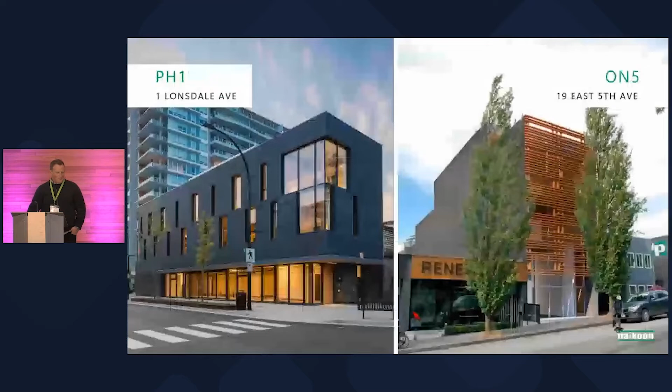I'm going to present two projects today that are executed. They're completed, they're occupied, and they have a lot of similarities to them. I'll start with PH1.

This is a 3-story mixed-use building constructed in North Vancouver. Primary structure is glulam and CLT, built to Passive House standards, and it contains a restaurant on the bottom floor and 2 levels of office above. It's just under 700 square meters in size, so it's not a big project, but it's a mighty one. There's a number of complications. We've got projects on the go now that are 10 times the size that are easier than this project was.

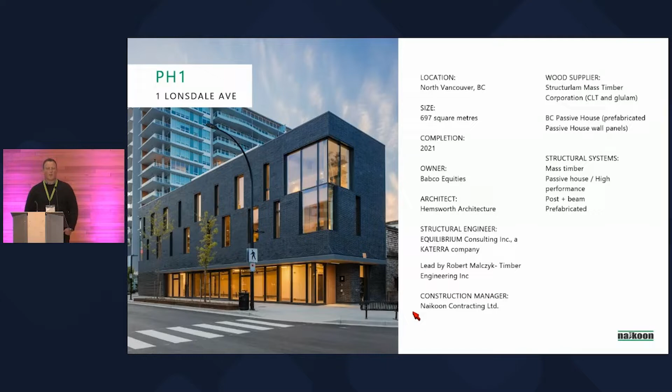A wonderful team to be able to work with - Hemsworth Architecture was the architect in charge, Dean Schwadike led that, and Equilibrium, a Katerra company at the time, was the structural engineer, led by Robert Malczyk, who's now formed Timber Engineering.

Just a quick shout out - there's over 150 people that touched this project, and they all added a piece of value to it, from the labor, boots on the ground, right up to the prime consultants and sub-consultants. It takes a team to execute something like this collaboratively. A special shout out to the owners for being innovative and forward thinking.

This was 5 or 6 years ago when this thing started, and about 3 years were held up in the development permit process to change a text amendment from the word 'this' to 'that'. So it took a while to get off the ground, but it was very forward thinking at the time.

Just context on site location and logistics. That's the site there, bottom of North Van. If you know it, it's right across the street from the Polygon Gallery, a beautiful building by Patkau Architects. It's a 25 by 140 site, 0 lot line conditions, with a neighboring property on the corner - a pretty active public thoroughfare, bus route, and a very active community.

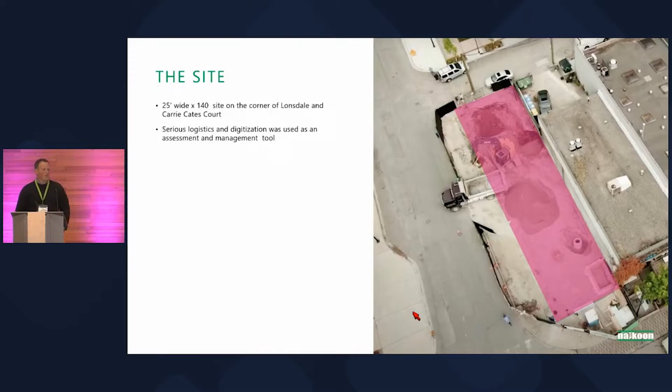Our scope as the builder - I put in quotations - as we've found over the last 10 years, our scope of work seems to have evolved a little bit as the industry evolves. We provided standard construction management services here under CCDC 5B. We provided digitization services from a virtual construction perspective, as we call it, because that's exactly what it is - I'll get into that later. We were also able to provide prefab and mass timber trade assist because we have that in-house, about 30 carpenters on our staff who are specialists in this. We were also there to provide passive house expertise.

We've completed a number of certified passive house projects across both the Part 9 and Part 3 sectors, understanding air tightness and ventilation strategies to try and optimize this building to actually get it built. There was a point in time where this building probably wasn't going to go because it didn't pencil, but we worked hard as a group to make that happen.

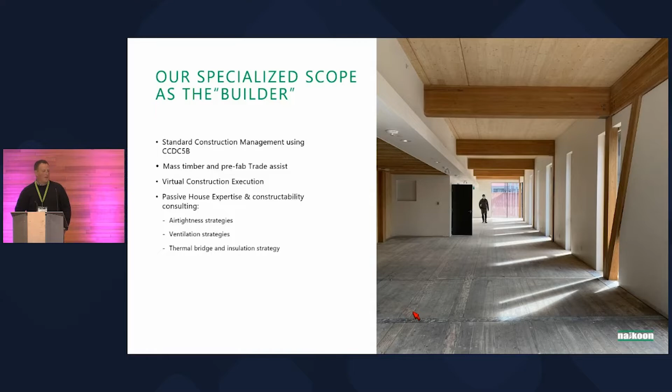From the digital side, it's a digitally integrated design and construction process - it's a bit of a mouthful, but that's what we've kind of come to land on.

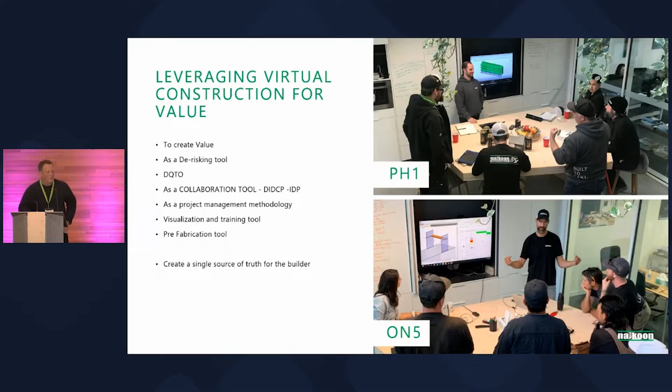It's going to take some time to adapt, so we've got to meet the gap somewhere in the middle through incremental work and effort.

And so I think having us as a builder, construction manager, at the table as a partner and integrator to the construction side of the project, along with the prime consultant who's the integrator of the design side of the process - how can we not be sitting in the same rooms together earlier and integrating these two things? Let's eliminate that line and get together sooner.

It's going to allow us to do things and try to optimize, eliminate redundancies, and find ways to get projects built. I think there was a comment about 20 projects designed and one built, and that's sad, and often it comes down to cost.

We really believe there's 20% of waste inside of these things. The fees, the services, the costing, the goods and services that are put into there, they all factor in the redundancies, inefficiencies, and sort of tolerated acceptable ways that things go in our industry. So let's work on trying to eliminate those.

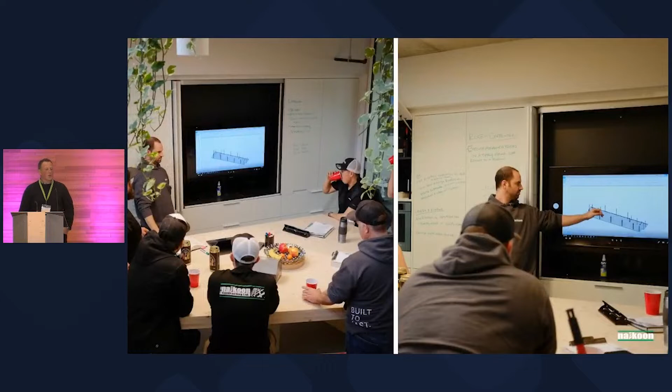Just another shot there in the office of these sessions where we would have the architect, engineer, boots on the ground, crane operator, anyone that's going to be critical in the sequencing of the project that we're executing.

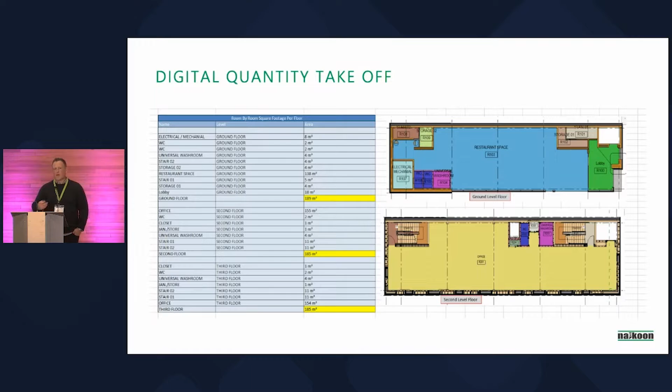Some more shots there, early days, digital quantity takeoff. Once we have this model, this single source of truth that's an actual model virtually constructed to a 400 level of detail, we can extract the data from that model and use it. The most accurate quantity estimate you're ever going to get is going to come from a model like that versus a manual process or a Bluebeam or a PlanSwift.

Being able to move on that and have live action on that model, to be able to have quantifiable conversations in value engineering and these types of instances that we all know we face regularly in projects, and is sometimes a frustration point or a point of waste.

In this case, this wasn't a BIM project, so most of the consultants were in AutoCAD 2D. There was a bit of SketchUp models floating around, but we made the decision to model mechanical in-house because it's so critical, and that's one of the key points from the integration side. Having the modeling technician, the installer, and the project manager all in-house on our team allows that to be very agile when we're going through these processes.

The technician can lean over to the project team or the construction expert and say, hey, how is this actually going to go in reality? And that avoids trying to bounce that for a 3-week kind of turnaround to get a decision made on a shop drawing or something like that.

So that's just retooling the business to be able to get ready for the robotics world and the other things that are still quite far away from where we think we're at today as a construction industry.

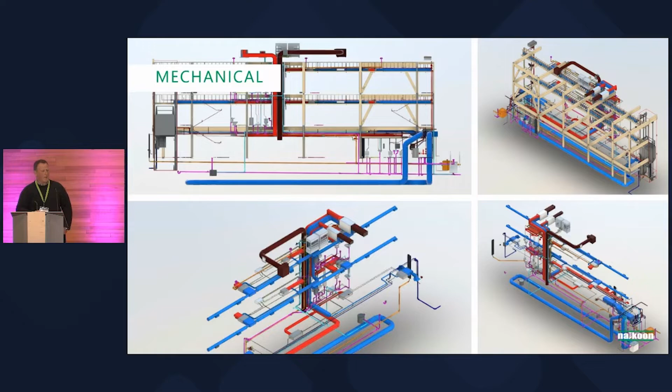Just some more shots here. I think we've all seen sort of the constructability analysis and the clash detection or clash deterrent to try and move through these projects successfully.

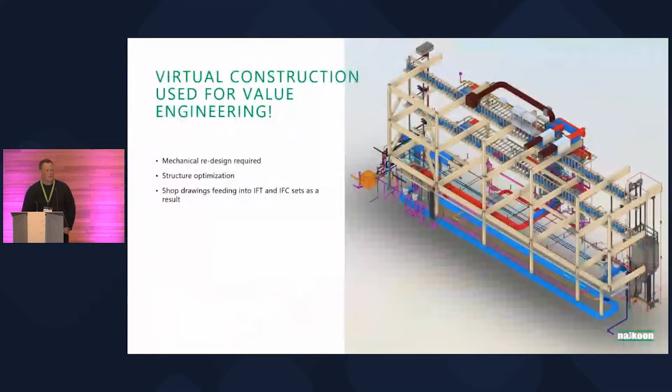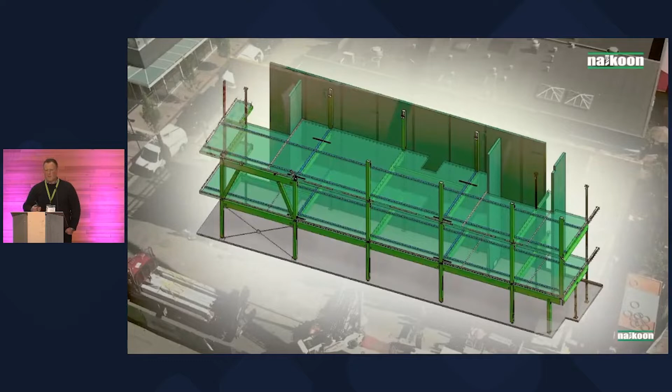Let's play a short video here, showing the result of the virtual construction of this building. So, slab on grade, there's no parking under this building. It's in North Van. You can see the final digital sequencing model. This is the result of probably 6 months of effort, multiple sessions, and actually constructing the building piece by piece.

Originally, it was a 21-day install, and this north wall, which is the wall adjacent to the zero lot line building next door, typically you'd see that as concrete block. That was always going to go in first. From the engineers, the architect, us, when we started this, that wall was going to go in first. There was no other way.

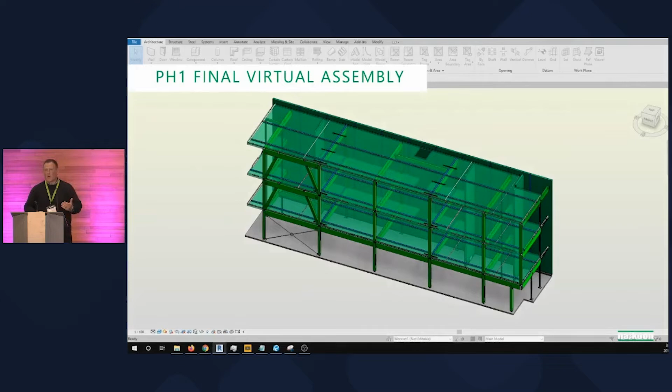Through the course of these sessions, a comment from a carpenter who was sitting in on the session—he said, well, what if we put the building up and put the wall between the two buildings? That's all it took for the group to start exploring that and realize that's a better way. That brought us down to 15 days and then down to 10 days in reality to install this building and envelope. I'll show you that in a second here.

I guess now moving into prefabrication. I could catch my breath here—I'm trying to get through a lot of content.

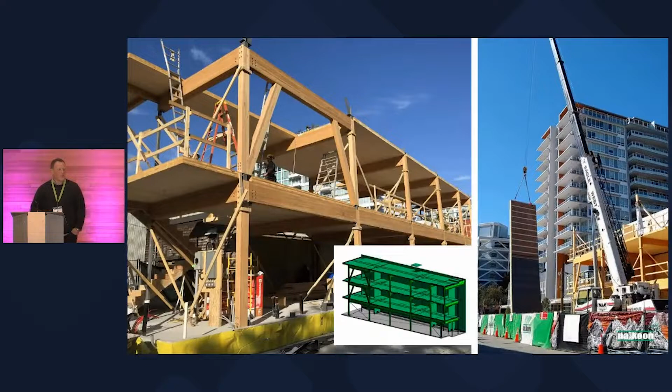Moving into prefabrication, leveraging virtual construction to be able to prefabricate this building, which was hugely successful. Just some side notes here—you can see we call ourselves prefab gypsies, so we'll just find a yard, someone will allow us to be there, and we'll set up our prefab shop.

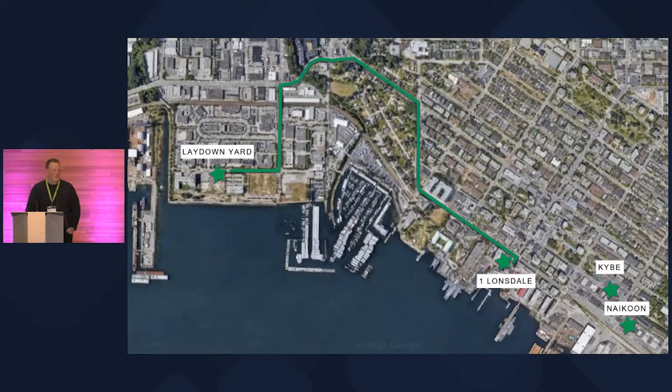And we did that here, 7 kilometers away, on a 2-acre site waiting for a development permit. So there's no shortage of those out there, is there.

We were able to prefab everything out in our yard there. Very rudimentary fabrication—we're just taking what we do on site and moving it off site somewhere else, trying to take sequence of construction and move it into parallel to save time. So trying to pick off little pieces one by one: 2 days, 3 days, 5 days. How much time can we save by running things in parallel?

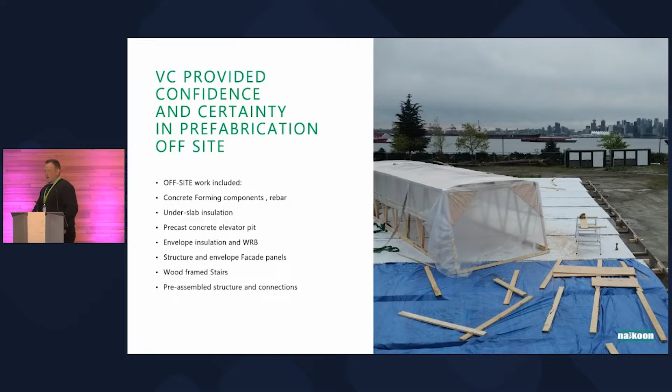So you can see our prefabrication hut there. We were able to prefabricate a number of things—this is a shot of the underslab insulation that was fabricated off-site. It's a passive house building, so there's about 2 feet of insulation under the building. But we were able to do that.

So site work's going on. The form components are being constructed and labeled in the yard, then brought to site and installed in 2 days versus having that workflow occur on site in 5 days. So incremental saving of 3 days, but it all adds up.

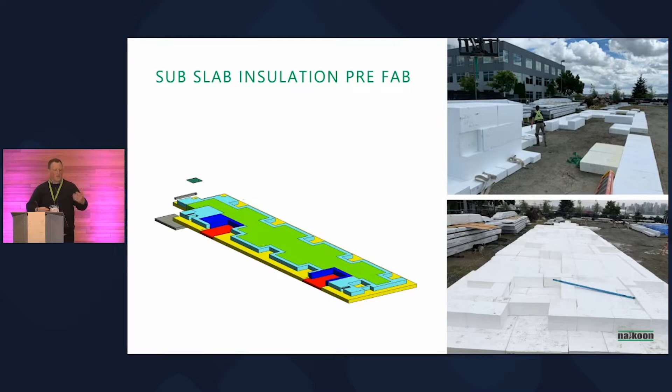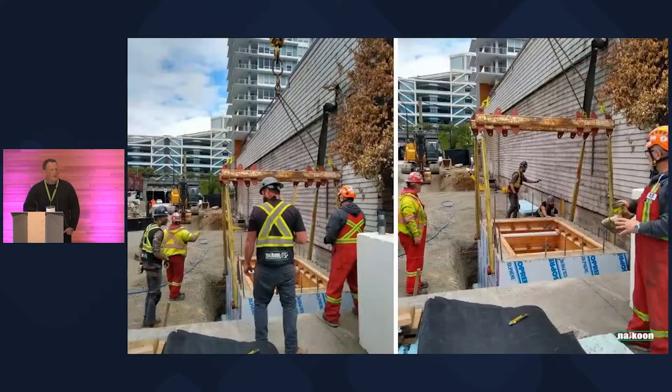This is a shot of the elevator pit. Really the only sub-slab piece of concrete here is the elevator pit, so we precast that off-site in the yard and dropped it in—damp proofing and all—backfilled it, and saved a 5-day workflow that would hang up that corner of the site and have to wait before we could move forward with the subsequent slab work.

Pre-installing hangers, bolts, brace bays—as much as we could put on the ground, safer and higher quality. We did that also in the yard.

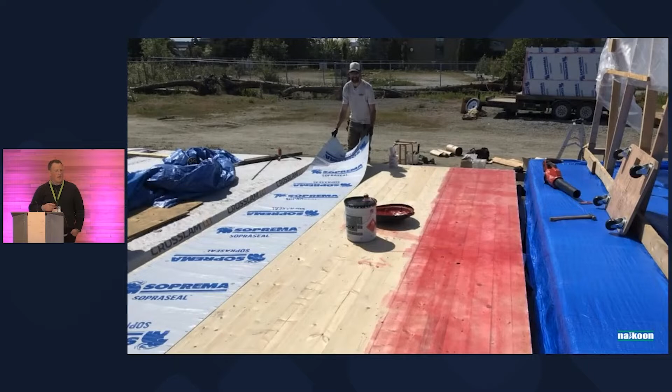Weather-resistant barrier, the panels here. Remember, it's a passive house, and what we know about passive house is we need to build it airtight to a certain standard—one of the primary project objectives was to receive passive house certification. So we were sweating on this one for sure, because there were over 60 breaks in the continuity of the air barrier, and we know that's not good. So we had to come up with systems to figure that out in prefab.

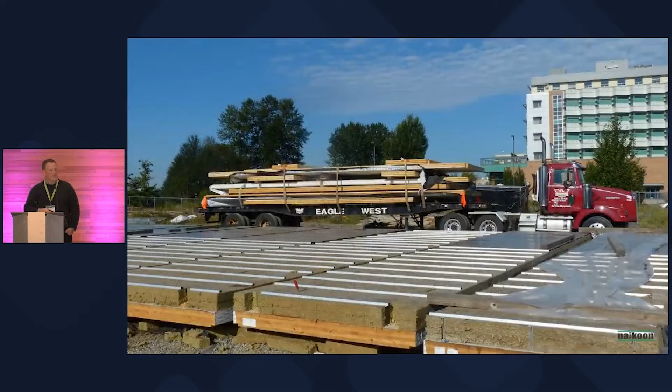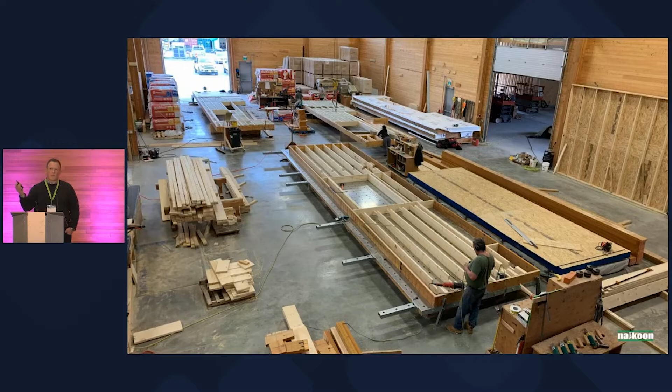Insulation, clips, counter flashings, and some metal protection board went on these panels. There's a shot of that north wall in the yard ready to be installed. BC Passive House up in Pemberton provided the exterior envelope SIP panels, which clipped onto the vertical structure.

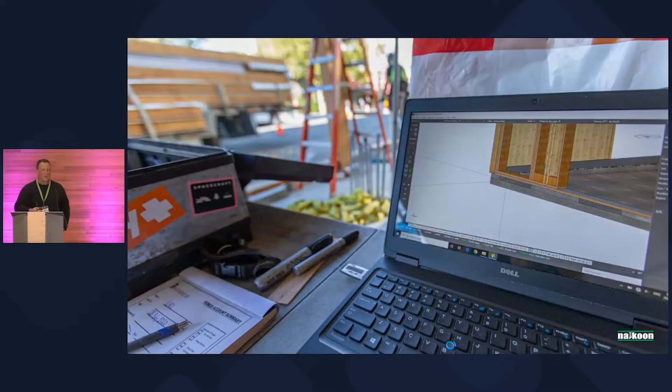So get into the installation piece—a pretty blocked out schedule here of 10 days: 8 days for the structure, 2 days for the envelope. Again, just reiterating, we were at 21 days, brought it down to 15, got to 10 in the digital build, and then executed that on site. Touching on the days of drawings on site, and stacks of ASIs and other things to try and figure out where things are at—we've got a model, we've got the source of truth that we trust because we built it from a construction mentality, and we're using that on site to run the building.

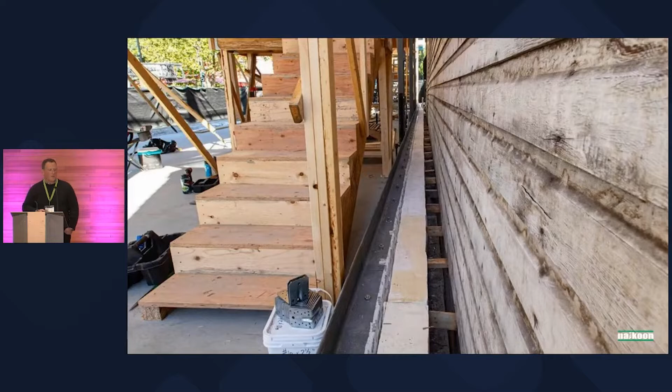The north wall here—I'll just highlight some of the slides to move it along, but you can see the narrow conditions here, being able to slip this wall between the existing building and the new building we built. And just some fantastic weather—we had good weather. You can see that was lucky.

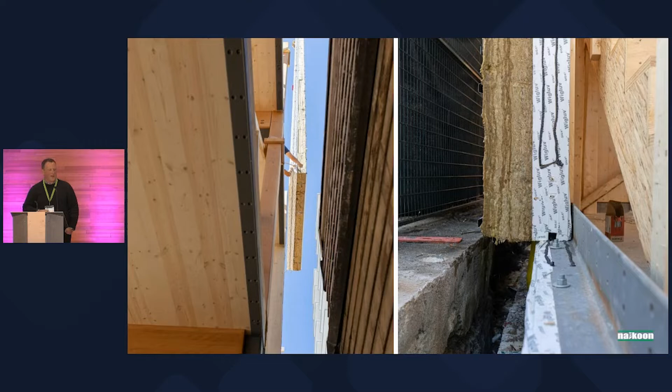Fantastic shots here from KK Law, and some of the belt and suspenders air tightness work that we had to do to meet the project objectives. You can see here there's less than 20 mils clearance between the building and the new building. And then the shot of the inside with the air detailing wrapping into the building—you can see the photo on the right of taping that air joint.

So the air barrier really went outside to inside and outside to inside, then capped with a plywood strip, and the CLT remained exposed inside the building, which was beautiful. Just a shot of that wall.

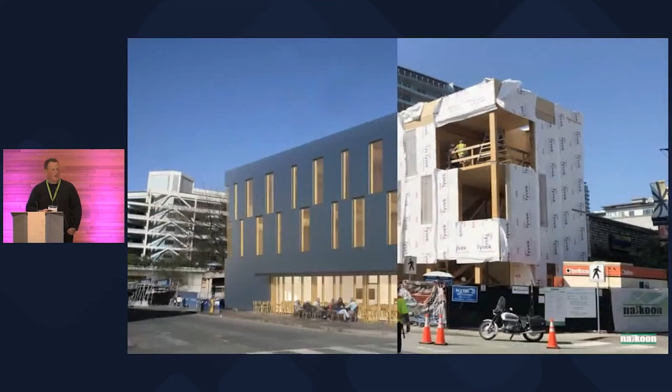Going from the panels, then wrapping the building—some slides highlighting the digitized process into reality, and really seeing this through. There haven't been too many projects that have been able to execute this level of prefabrication and do that successfully. So, a shot of a beautiful, timeless piece of architecture there, for sure—it was meant to be there.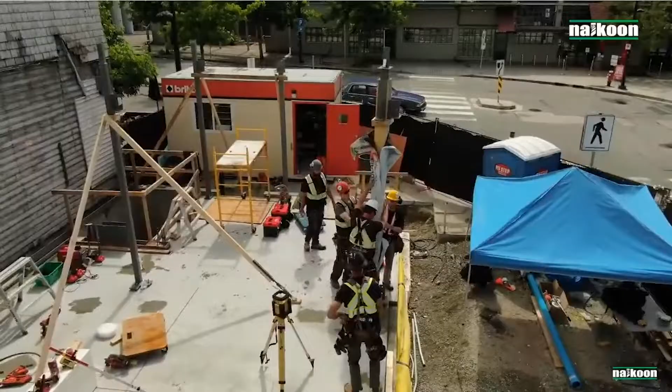Is that 40 minutes already? Done? Well, what time do you want me done? Minutes. Thank you.

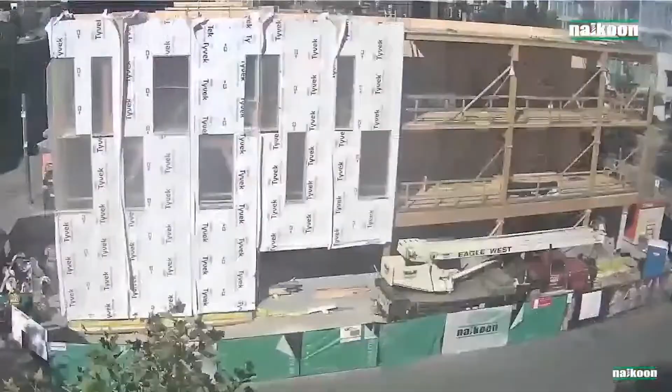Yeah, we spent more time taking photos and video than project managing there, it looked like. But...

From slab to roof, going on 10 days - full structure, building envelope, windows going in. We demoed the existing building in January 2020 and basically broke ground the end of February. And we all know what happened - early March of that year was this global pandemic thing, so we hadn't thought about that. But overall, we were able to get through the project successfully. A little behind schedule, but some supply chain issues got us there, and the panic in the marketplace that occurred for a brief period was fun to manage.

So overall, recapping the project here, just some notes. One of the first certified Passive House office buildings in North America. Pending, it'll be the first certified restaurant in the world for Passive House. 10 days of on-site construction spent on the superstructure envelope. No on-site modifications were needed. And I believe the first CLT exposed firewall in BC, a 2-hour rated firewall left exposed. And super airtight - we achieved an airtightness of 0.45 at 50 pascals, and the superintendent was able to get a good night's sleep once we had that testing done. So overall, pretty successful project.

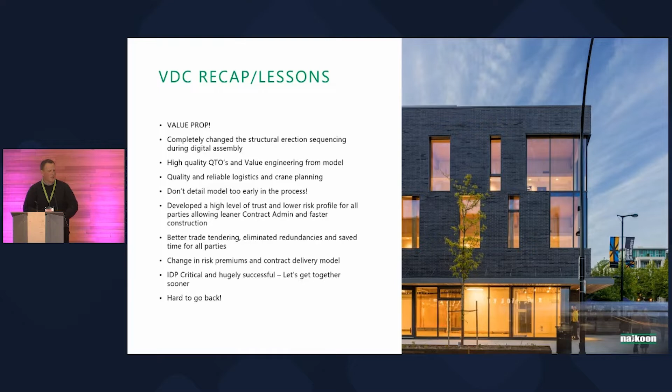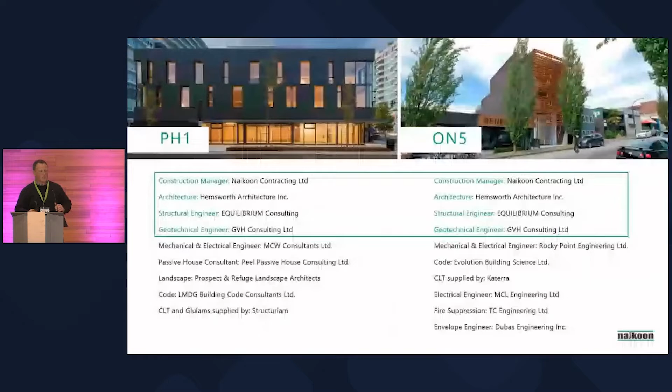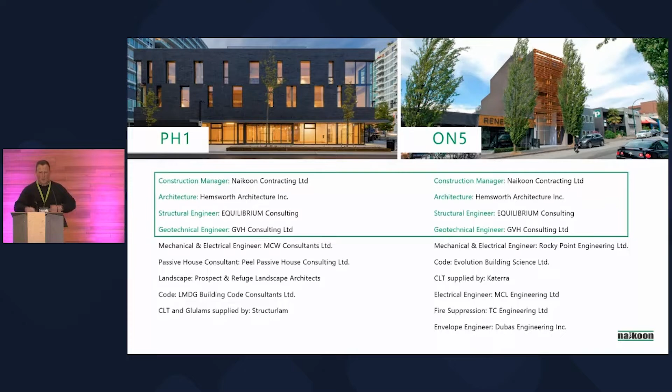So I'll move forward now quickly through On5. I just want to highlight some of the advancements we made from the Lonsdale project to the On5 project. We were super fortunate to have one project start right after the next, with the same core team - same team on construction, same architect, same engineer, and a mix of sub-consultants underneath. It was hugely valuable to repeat this process and apply our learnings immediately into the next piece. If we can find repetition like this in the marketplace, we're going to be able to solve some of these issues.

This project's a little bigger, just over 840 square meters, completed in 2022. Robert Malczyk is a structural engineer and the owner who occupies the building, so there was definitely an interesting dynamic on the delivery and setup of this, and the rest of the team's noted there.

This site is more tricky than the last - same size, 25 feet by 140. Now we have a building on either side, and you wouldn't believe me, but next door had an antique lamp store inside of it. That was one where I thought, okay, this could be interesting - one-of-a-kind lamps next to a construction site. We didn't break any, and everything worked well.

Overall, you can see it's a challenging site, bustling Mount Pleasant. We ended up having to close Ontario Street down for a couple of weeks, so it was challenging with the city and other things. Our scope here is largely the same, same team, and we were able to evolve on some of the things we learned on the first project.

Same thing here. We got on board earlier this time because we all agreed that was going to be better. We advanced the integrated design process and tried to make that more efficient so we could have more efficient regular meetings and not tie up too much time.

Earlier involvement of subject matter experts from the trades, glazing, mass timber suppliers. We want them at the table. They're going to inform the IFC documents.

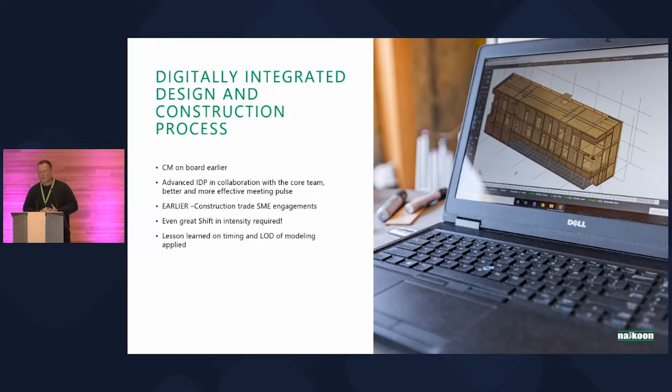Really that's what we got to, and then further trying to push the intensity of the consultants to know that we're virtually building this building. The delay of not having the complete set for the prime consultant to be able to coordinate delays our virtual build. Just view it the same as if we were in the ground, where everyone sort of waits till the panic moment, and then all the site instructions start coming in. There's an incredible amount of inefficiency there, and that's just normal.

That's the stuff I was talking about earlier. We've got to get that out of there. It's costing so much money to the project, and this is what we believe is the way to do that.

And then we learned our lesson on level of detail and the timing of modeling, right? We threw a huge amount of work in the garbage because we modeled too early on the Lonsdale project, and we had to start over because the design changed so significantly. The process of virtually constructing is where the value is unlocked, right? So if it changes too much, we really have to change gears and start over.

So we learned that, and this time we waited, using design models to do some of the quantity takeoff stuff and pull out other early value, then we'll move to the virtual construction model once we've reached a reasonable level of design definition.

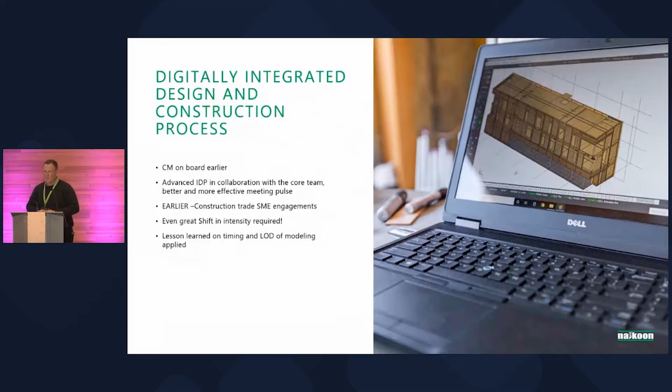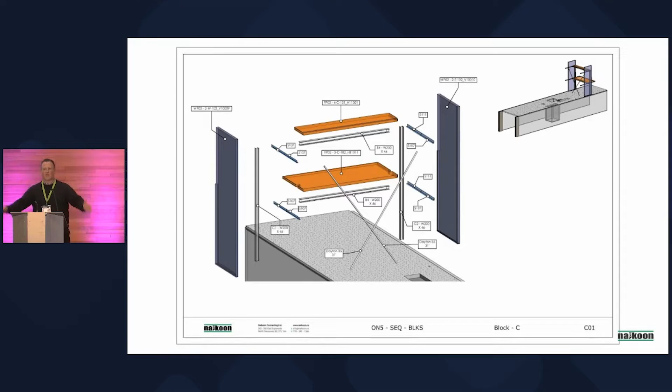Advancements to that - we moved into a much more sophisticated shop drawing level of detail with labeling, and we broke this building down into blocks on how it's going to be constructed. It's an innovative building - there's no posts and no beams, okay? No glulam posts, no glulam beams. It's just CLT vertical and CLT floors hanging off angles.

Super innovative structure. We were able to advance this and really sophisticate our processes internally, leading to sheets which allow us to understand where this component is in our yard, where it is on site, and what load it will be on. We've got a very tight street, so we're just cycling loads of components intermittently throughout the day.

We were able to really break this down, and now advance further by adding those Apple AirTags to things, seeing where things are and playing around with that. But this is sort of the beginning of that.

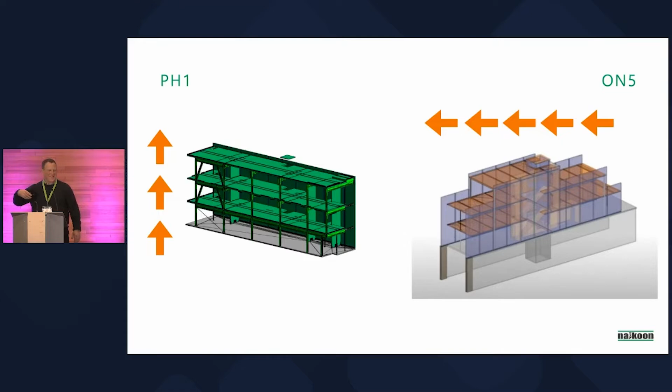Gravity tells us to build a building from bottom to top. That's how we've always built buildings - never really thought of it another way. But this building had to be built from back to front because of the way the structure was designed. Without the digital tools, I don't know where we would have ended up here.

So this is the result of those efforts - again, the virtual construction sessions, having the right people in the room, and really figuring out how to build this building from back to front.

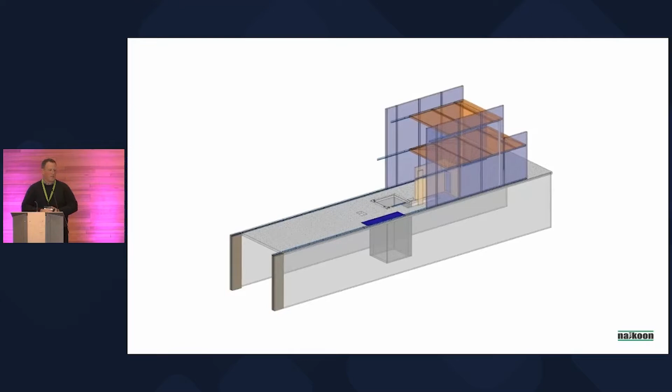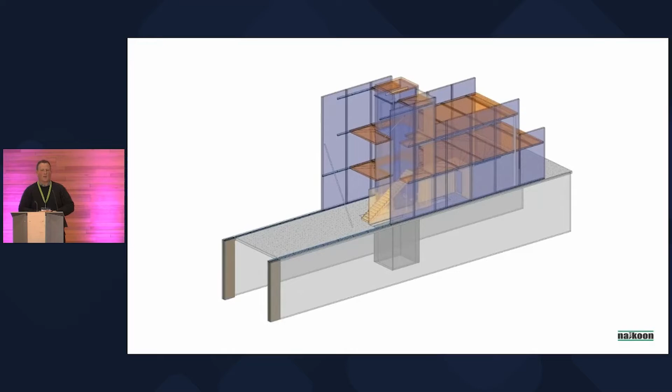It's a CLT structure sitting on top of a concrete slab on grade - sorry, a suspended concrete slab on block with some warehouse space below. The sidewall panels were full height CLT, maxing out the manufacturer's capabilities, with metal angles supporting the floor and roof panels. We used an innovative gluing product, TS3, which allowed the structural engineer to get a structure on the CLT panels without any beams and achieve clear spans in two ways.

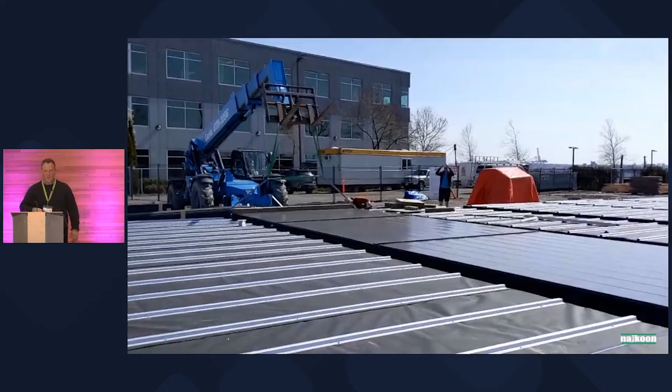Advancements to prefab—I'll move through this quickly. We moved to a fully clad CLT envelope facade panel. We think we're the first ones to do this in Canada, and we went further than Lonsdale.

This is just a video of testing that. Was the metal going to oil can? How are we going to transport these things? And was this going to work? This was the mock-up piece that did end up in the project as well.

We made the call that we were going to do that. I literally snapped this photo across the street from the building when we were doing install. So we're doing this, and on all of the other projects, we're doing this.

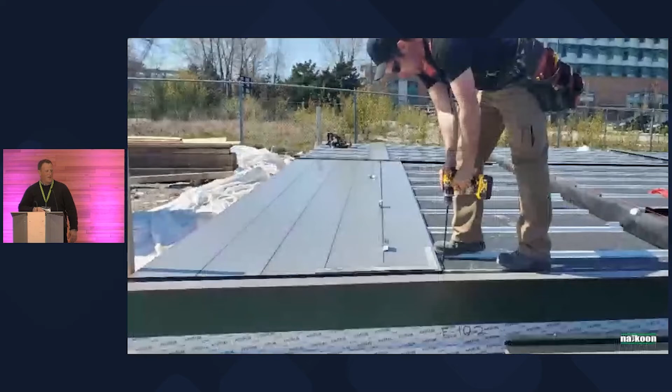Safety, quality, ability to inspect, time, energy, effort—all of these things are considerably changed when we can put this cladding on the floor. We saw up to 6 times labor savings on this, not to mention some other savings and benefits.

If we can figure this out, we're working on taller wood projects with this now. I think the pendulum starts to swing pretty quickly. I'll move into the install—got a couple minutes left here, and we'll wrap it up.

This is one day of a schedule, and this project was broken down to 15-minute increments. We were able to study this. Not a sustainable way to do that for all projects, but who's going to install what component at what time—so we broke the whole project into 15-minute increments.

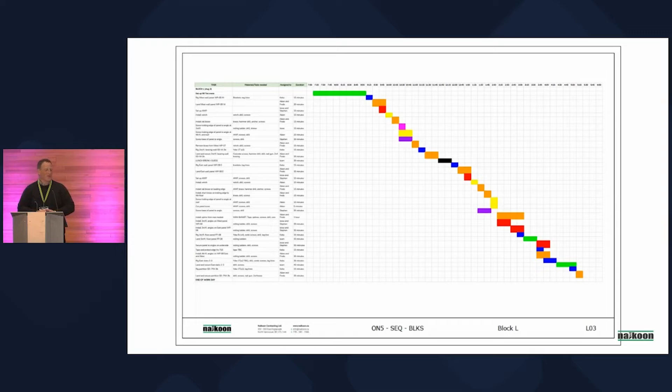Our claim to fame here—you can see we studied the actual duration versus the estimated duration, and we finished 15 minutes early at the conclusion of the structure and the envelope. That was kind of cool, we had a toast to that.

I'll punch through some of these slides quickly and then play a recap video for this project and wrap things up here. If there's time for questions, I can take one.

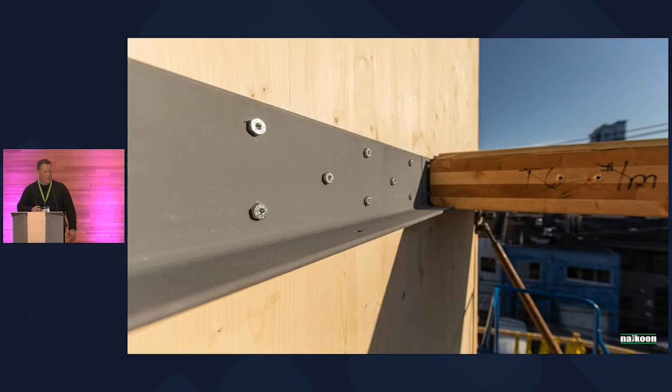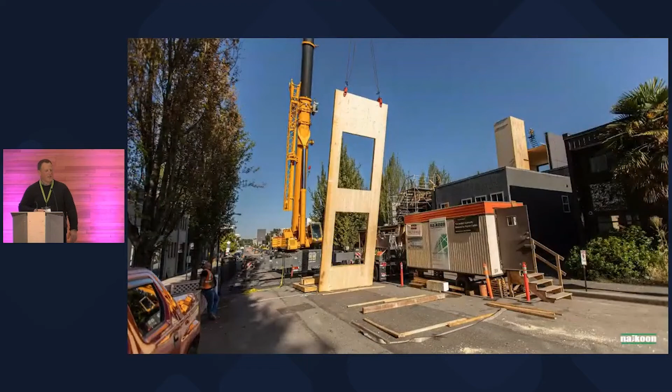There's the CLT support on the walls, the structural insulated panels being flown in. Some of the complexities of putting this building together—you can see here, there's a lot of parts and pieces. There's the elevator core going up, a CLT elevator core in this building with some innovative structure there.

You can see the level of precision in both the manufacturing, the crane operator, and the installers trying to slide floor and roof pieces between vertically erected CLT panels. They're able to bend them out a little bit and bring them back, but certainly some fine craftsmanship and work done on site there.

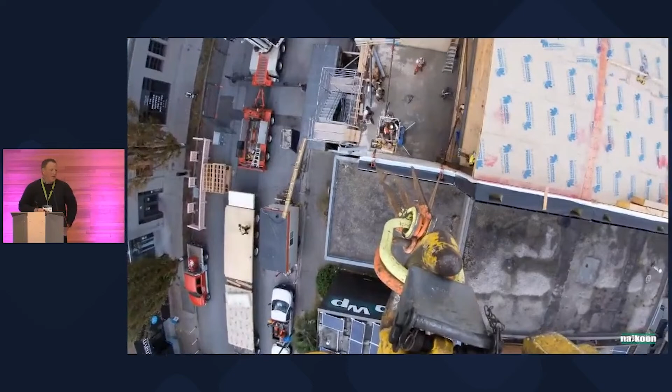This one might make you a little bit dizzy. This is the last panel we flew in, so somebody stuck a GoPro on the block to show you how we fly that in. So that's the result there.

13 days from the top of slab, the roof's going on. We pre-installed the roof membrane here, so a pretty incredible feat. I think this would typically take at least 4 times that amount of time.

Less disruption to the neighbors. We didn't break any lamps, and the neighbors were writing letters to the city about how wonderful the experience was having us in the neighborhood.

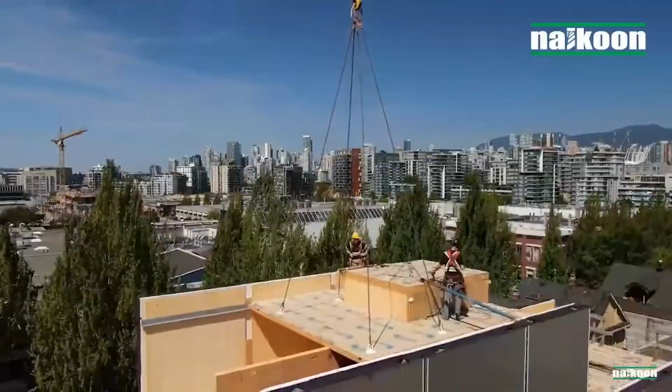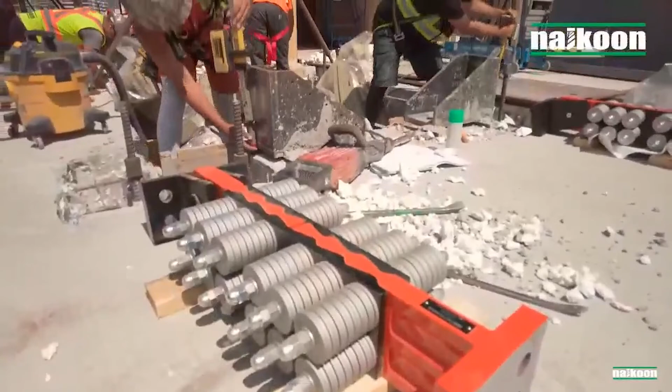Situated just outside Olympic Village in downtown Vancouver, On5 is a hybrid mass timber building composed of a concrete masonry foundation and 3 floors of cross-laminated timber, CLT. Designed to passive house principles, this highly innovative building incorporates groundbreaking approaches to insulative CLT assemblies and damage-resistant seismic design.

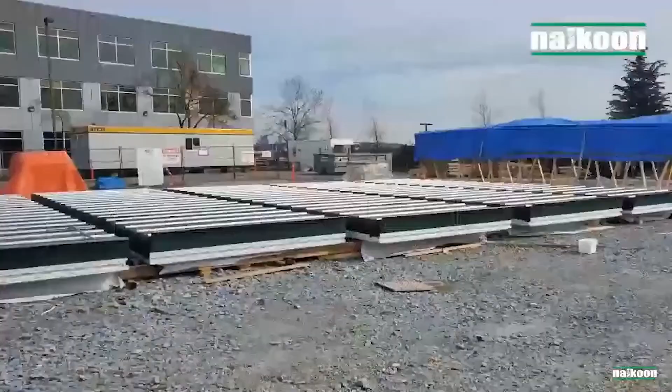A construction site sandwiched between 2 adjacent buildings on a challenging zero-lot line plot meant that the entire primary structure was prefabricated off-site at a laydown yard a short drive away.

The first stage was to build a digital twin of the building in a virtual environment, an important technical simulation which generates significant energy, cost, and logistical efficiencies. There are several virtual build models in action simultaneously, transferring data between systems, allowing the project team—including architect, structural engineer, and relevant subtrades—to collaborate in a dynamic build process, live and in the moment.

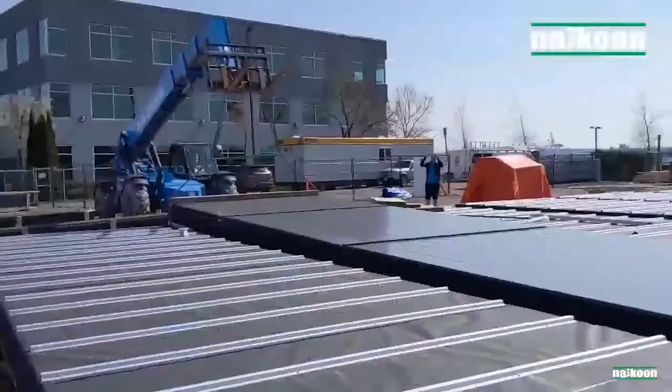Using data from the virtual model, load-bearing CLT shear wall panels and interior partitions arrive prefabricated at the laydown yard. While laying flat, insulation, rain screens and cladding are applied to the outside of the CLT wall panels, as foundational concrete work happens simultaneously at the build site.

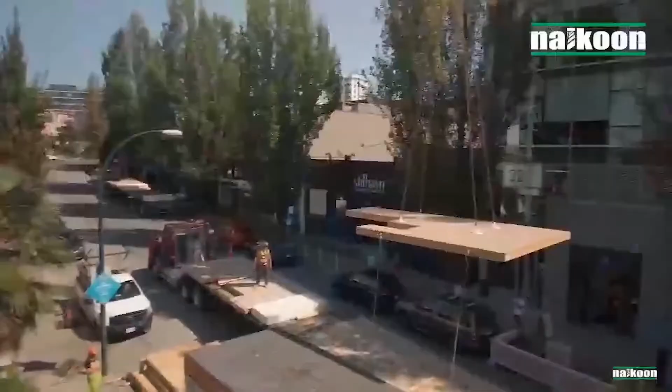Regular sequencing meetings using the virtual model to emulate full construction meant that the actual scheduled build time was reduced from 20 to 15 days. Even the order in which the trucks were loaded was a consideration.

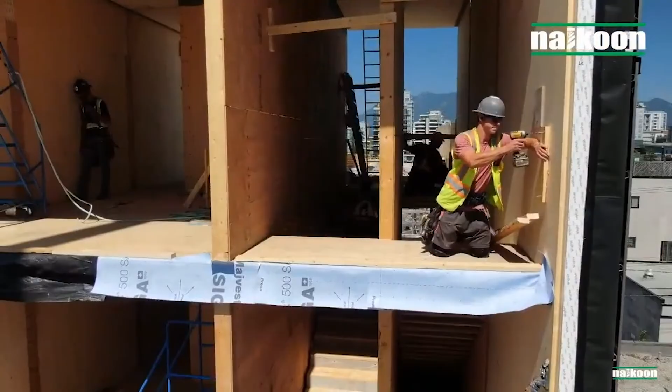The primary structure of On5 consists of two CLT walls which are held together by a CLT floor panel, utilizing an innovative adhesive system which allows mass timber to be used for flat slab construction, making it comparable to concrete in terms of interior clear heights, flexible layouts and efficient construction.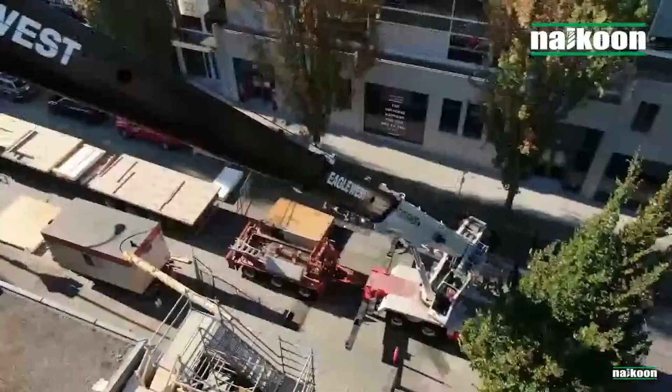The building incorporates a resilient slip friction joint system. In other words, it's self-centering and dissipates seismic energy, restoring the structure to center after an earthquake. A unique system which works particularly well with mass timber, since wood is one sixth the weight of concrete.

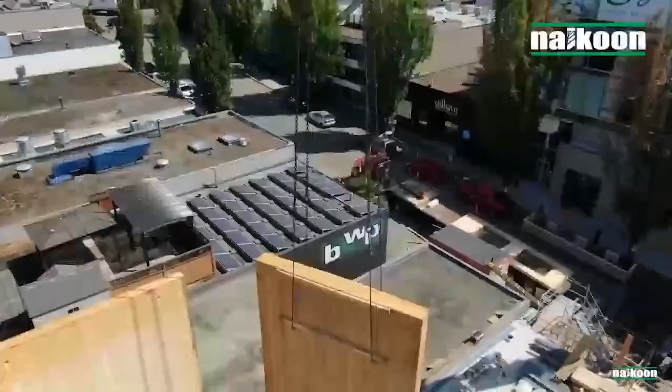Taking prefabrication to this stage is a step further for the mass timber construction industry. Having what is effectively a watertight building from day one drastically reduces the dangers, complications, and expense of time spent on site.

This is On5, a building typology which makes it easier for cities around the world to develop on challenging mid-block locations.

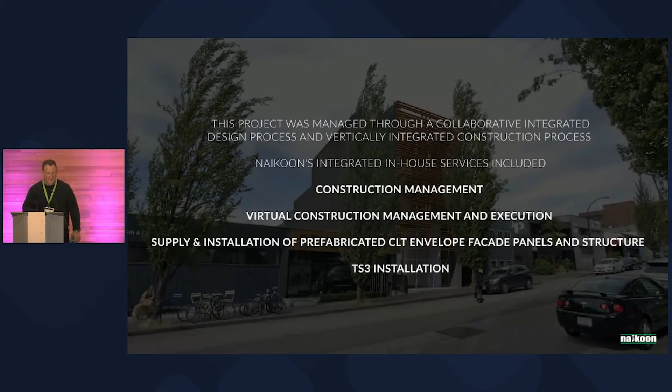Awesome, so yeah, lots of support on this project. It was an amazing team to work with. Some of you here, and what a privilege for us to be able to work on this and advance some of the efforts that I've been pounding my head against the wall for 4 or 5 years on, and actually being able to see these come to reality and in execution. We've been able to move forward with much of this stuff now onto the projects we have in the ground that are a little bit larger and actually less complex.

So these projects are so tricky, and there's not a ton of scale there from a cost of construction standpoint. So we're finding our lives a lot easier now with some of the buildings that have much more repetition and scale in them, and applying some of the principles here.

So just recaps and lessons learned from the builder's perspective, of course, that's where I'm coming from here. We really need to be involved in the project at an early day if we want to try and optimize this as a team. This thinker and doer, hard line in the sand, design-bid-build model just doesn't work for us. It's got its place, but for projects like this, we just don't see that. I don't think we can go back to that. We try not to participate in that type of project.

Design models first before virtual construction, we mentioned that, we learned that. The process of virtually constructing the building is where the value is, and so it's not a model, it's not a design model. It's a process and a methodology.

So we want to seek partners that understand, have workflows, and are able to match up workflows with ours and see if we can find the integration points to create efficiency and eliminate redundancy.

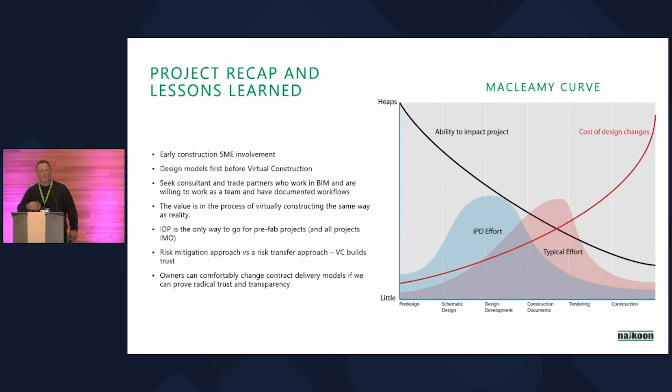So we proved that out in a quantified manner here, and we were able to move this forward, and it starts changing the way projects could be procured and different contract models where the owner can actually have trust and validated quantified trust, not just a handshake and 'trust me, we're gonna do you well,' but here's what you can see, you can see what's gonna happen here.

So incredible there. We've advanced our quantity takeoff and automated some of our quantity takeoff, and the guys are now playing with Dynamo and other things, trying to optimize the virtual sequencing process from a technology standpoint. Over my head, I'm just a front man on this stuff, but they're doing some neat things.

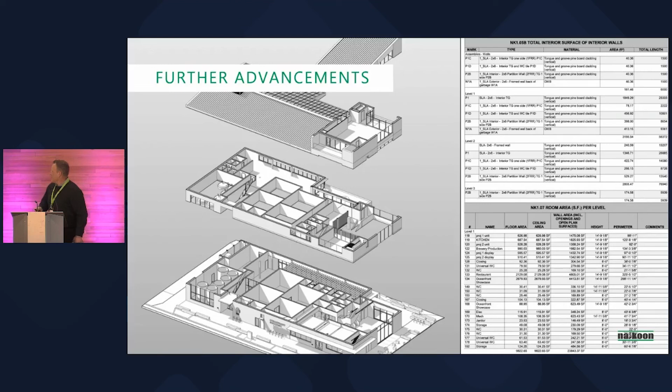And at the end of it, I'll just punch through these and say thank you, because I took a little bit too much time, but appreciate you guys having me here today, and learned a lot from all of you, and would love to chat, connect, and understand your perspective on the business and the industry, and compare notes. So thanks.